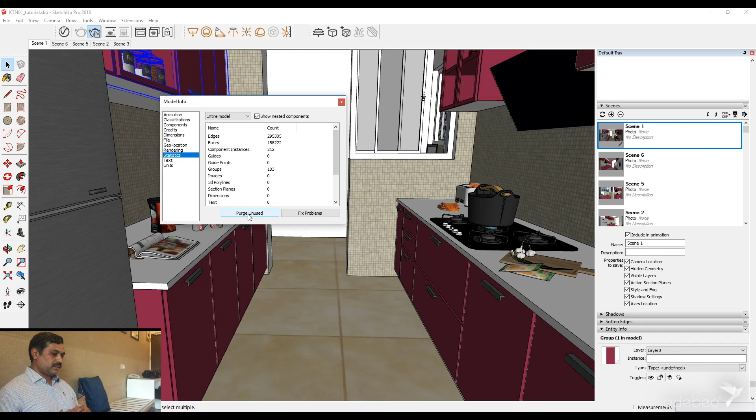Before we start, there are a few things we would like to look at in the model. The important thing is the purge. You can access this purge from the model info and make sure all unwanted elements are removed from the model. The entire model goes into the memory of Vray in the background, so we have to make sure we clean up the model perfectly before we get into the rendering.

The other important thing I would like to check is the orientation of the faces. It's important to know whether, when applying the material, we have used all the front faces. There is a trick in the styles that we can use to check whether all our faces are oriented properly. So if you go to the styles, you can set up the front face and the back face as a different color.

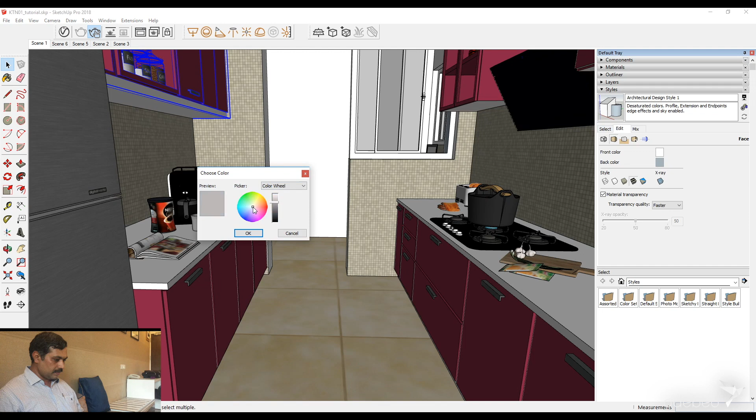I'm changing it to red color at the back so that we can clearly identify any elements in the presentation. Right now we are not able to make out anything here because everything is shown with the shaded texture. The moment I change it to monochrome, we'll be able to identify if there are any surfaces that we need to address.

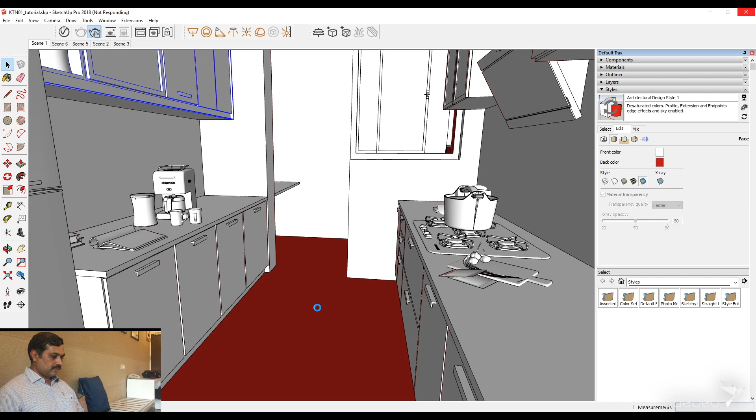So now in our model, you might see that most of the surfaces are looking correctly oriented except the one at the bottom, which is the floor, and that might require some kind of fix. So I will reverse this particular face so that it will orient the white surface on the top and the darker surface on the back.

Once these settings are done, we can move forward with our rendering settings. Before you go further, it's necessary for us to make sure we add all required details in the model, such as the gaps that we want to see in the rendering, because the rendering engine will make sure the light passes through each and every gap.

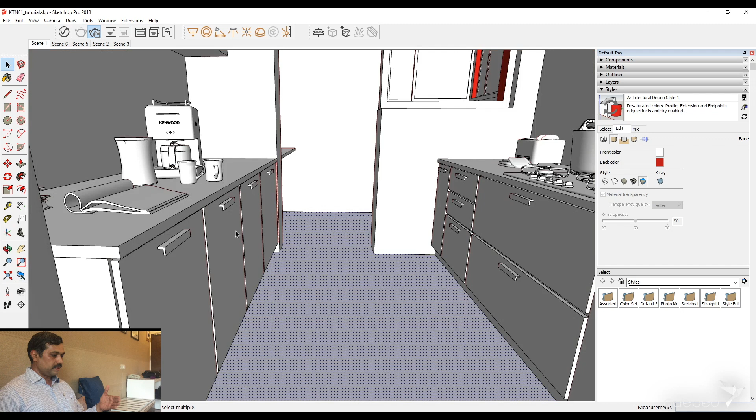Whatever the outcome, it will look nice when we have these details in our model. So don't hesitate to add as much detail as possible in your model, and it will be good in the presentation when you render it.

As you see, there are several scenes created in this particular model. It's very important for us to identify if we have any elements that are not part of the scene but are loaded in the model and will cause delay in our render.

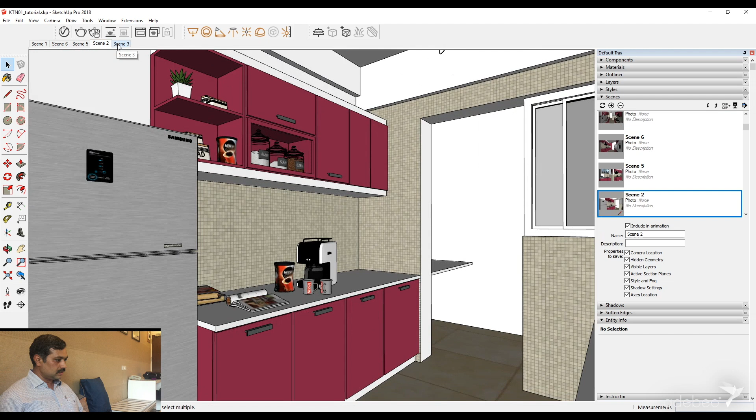Some of these elements could be high poly models, so we need to quickly check if we have any add-on model or component which could affect our rendering. I'm just quickly going through the remaining scenes of the model and checking if we have anything on this particular model. Okay, I'm finding it.

There is a model or component over here which is a high poly model, which could impact our rendering because this is not part of our scene 1 but it is in scene 5, and we need to make sure it is not affecting our rendering.

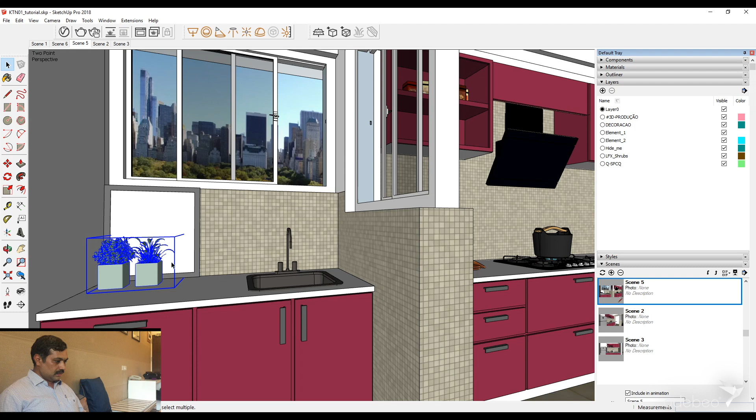The way I manage these things is using the layers. So we go into the layer and create a layer, let's call it 'hide me', so we know we have hidden this particular element. We will assign this layer to this object. There you go, so this object is in the layer now of 'hide me'.

So we will go back to our scene 1, and in scene 1 we will make sure the 'hide me' layer is off. So now we know that particular component is no longer loaded in the memory of our SketchUp model.

So all the elements we see here will get into the memory of Vray once you start hitting the render button. So we are all set to get into the Vray interface now. These are the three things that we need to make sure: we purge the model, we check for the front and back surface, and also make sure unwanted elements are removed from the memory of the tool using the layer mechanism.

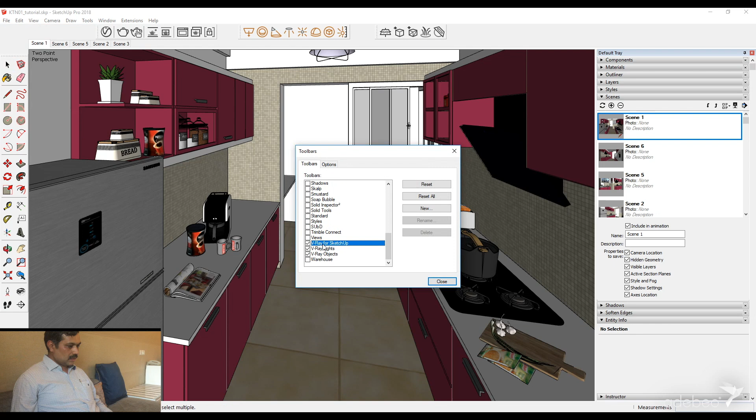When you install Vray, we should be getting three toolbars. If you don't see them, you can access them by going to view toolbars and looking for those specific toolbars that are installed. Please click on the checkbox and the toolbar should appear. The three toolbars are the main toolbar, which is Vray for SketchUp, the light toolbar, and the geometry toolbar. Being the beginner's toolbar, I'm limiting our scope to these two toolbars.

The first one here is the asset editor, which controls most of the functions of Vray. After that, you see these two kettles - they are the render buttons. If you hit any one of them, the system will go into the render mode. So right now I'm not hitting them. After that, you have something called the viewport render. The viewport render is the current viewport, whatever we are seeing, that goes into the render mode.

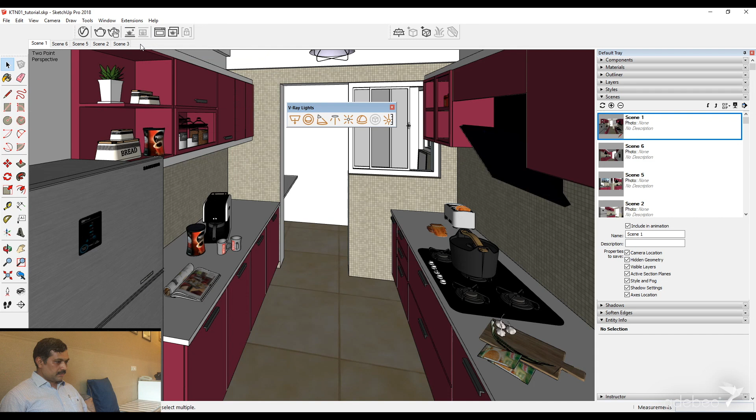This is something new appearing in Vray 3.6. Along with that, we have Vray viewport render region. Region and viewport render work together, so once we switch on viewport render, we can use region render. Now let's click on each one of them and see how they behave. Let me place them on top of it and start using them.

This is the master tool which connects us to material, lights, geometry and settings. In this panel we can expand either on the left or on the right. If I expand on the left, I'll get the material library that Vray has provided - a vast library which we can use in our presentation. You can even change the way they are being presented. This is the list view, and we can change it to a grid view to see how the material looks.

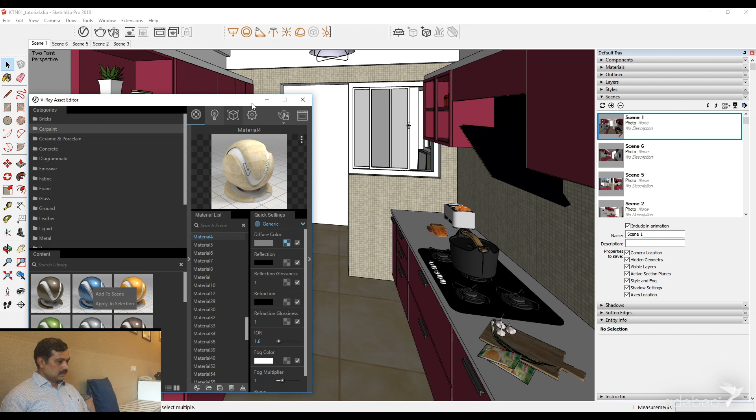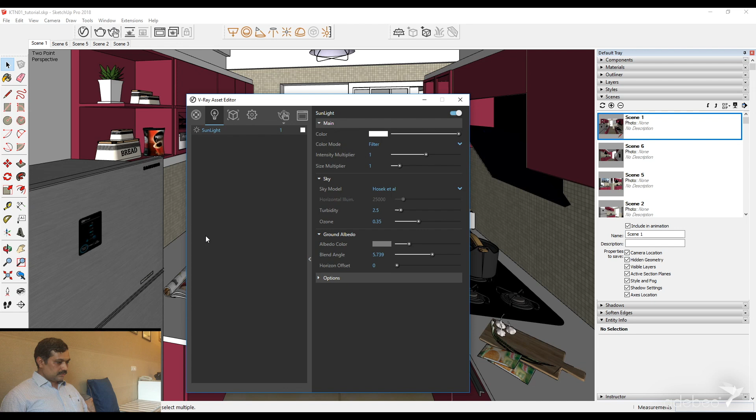Whatever material we want to bring in, we can directly right click on them and bring it onto the scene. The other settings I want you to take a look at this point are on the right side of the panel. You get more options controlling the material parameters. Because we are in materials, we get material related parameters, but as we move on to other subjects like lights, the right side panel changes and relates to the lighting parameters. So with the 3.6 version, the left and right panels appear according to the choice we make at the top.

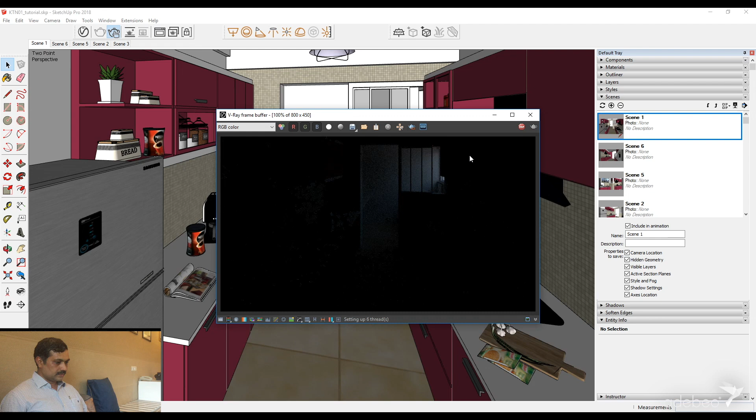The next tool is the render. There are two render tools available: one for production and one for test purposes. We can use test renders here, and remember, the moment we hit it, the system goes into render mode and it will take a couple of minutes to regenerate and show us how the render looks. For the test render, I will hit the test render now and we can take a look at how the render will come out.

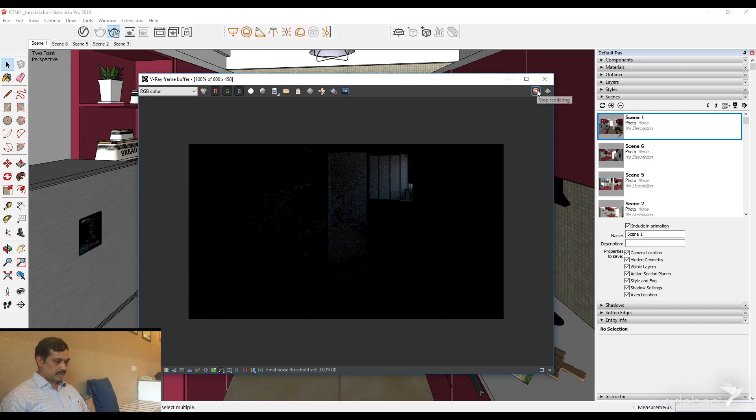This is quite dark right now because we haven't set up anything in terms of the lighting, and now we are seeing the interactive render mode. This is an infinite rendering loop wherein the system will continue to refine the noise appearing in the model during the render, and we need to stop it so that once we are happy with the render, we can stop it so the render is discontinued and we can continue to improve the rendering properties. This is the Vray frame buffer window which shows us the rendered image.

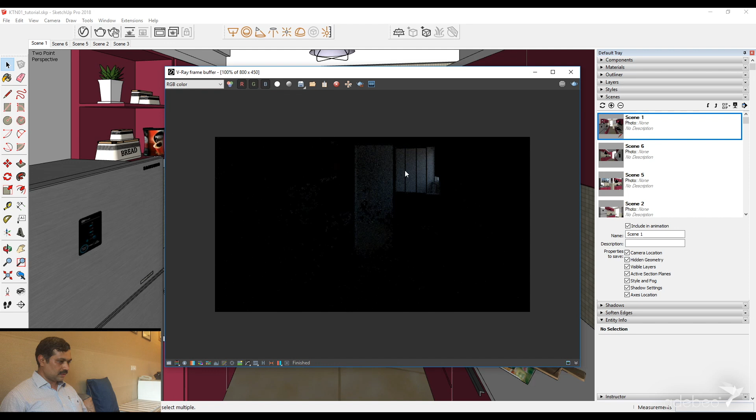We have several channels here that are part of the render. You will be able to see or switch on or switch off these specific channels. It's advised at the beginning you can keep them and take a look at all three channels we are getting. This window you can terminate and then recall from the frame buffer menu on the menu bar. So if I launch it again, we know the last rendered image is available here and we can take a look at how it was.

Also we have something like a region render which we can use here, so we can select a specific region to render, and when we say re-render, this is the re-render button on the top right which will help us re-render the specific region while doing the renders.

As you notice now, the rendering is only calculated for the small area that I had selected. This will be helpful for us to do test renders with several changes in the material. We can locally select a specific region and render it very quickly to see the result.

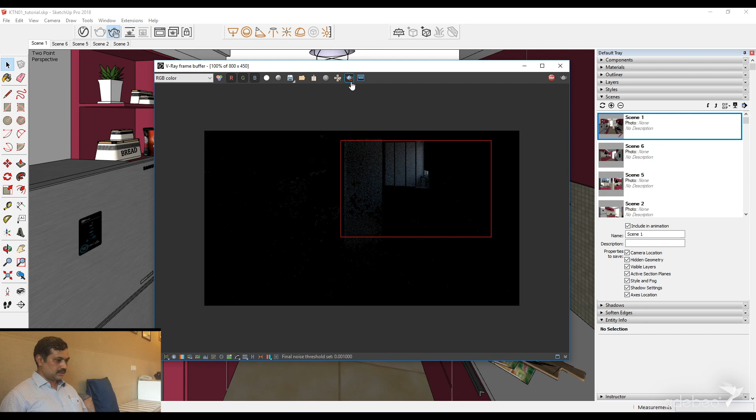We would like to now see how the render engine is configurable. If you click on the main button, which is Asset Editor, we can see the settings button on this, and we can start making the changes. As I initially did, we did the interactive render, and the second option we see here is the progressive. As you know, with interactive we can very quickly see how the render is getting set up, and progressive render we will use for the production mode.

Also, you see there is something called quality which controls the output of the render, and we can expand the right panel and control a lot of other stuff here. Since this is for beginners, I am not getting into a more detailed explanation about these things. We can right now set the quality to maybe draft or low, and then we can fine tune it for the final render.

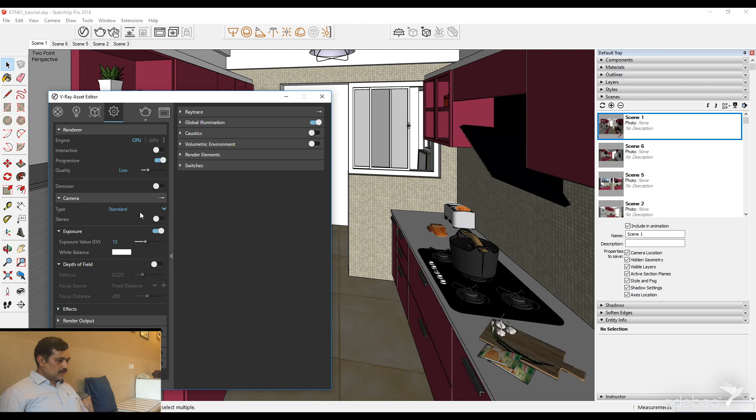There's also camera at the bottom here which controls the exposure value, which we can start changing to a different value. The lower value will give you more brightness and the higher value will give you more darkness. So depending on the requirement, we may have to configure this value. And now we have all set our render engine and camera.

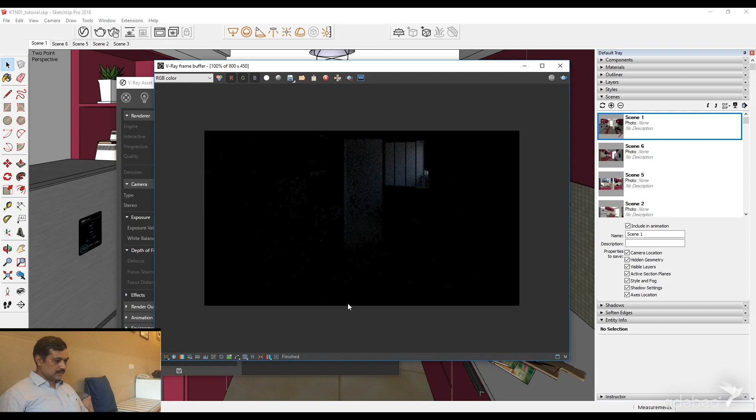To be on the safer side, I'll turn off both interactive and progressive mode. This is bucket rendering now, which is a little faster and the traditional way the render engine used to work. So if we hit render, we will get the newer version of the render quality that we can achieve. So let's wait.

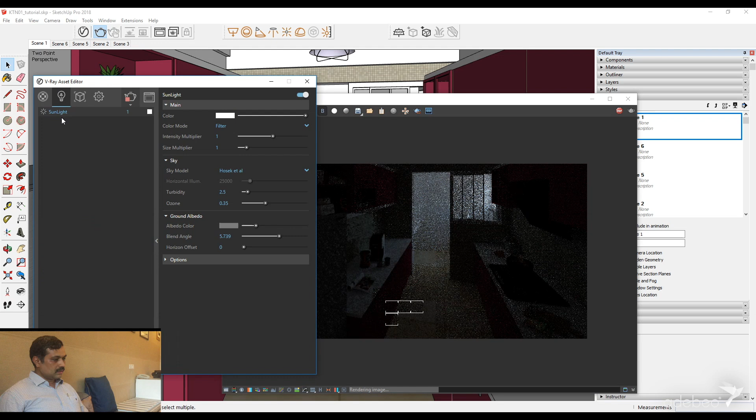Right now you see there is a light appearing, and this is appearing because there is a sunlight that's enabled. As and when we start the rendering in SketchUp, normally the sunlight is on and this sun is coming from SketchUp, and V-Ray treats that as a source of light, and it gives us the render. So we will wait for our first render, and there we go, we have the first render appearing.

We have already applied several materials in SketchUp, and when we start setting up the rendering, it is important to get the lighting proper. I was going through the materials here, and I realized we have a lot of materials that will affect our render.

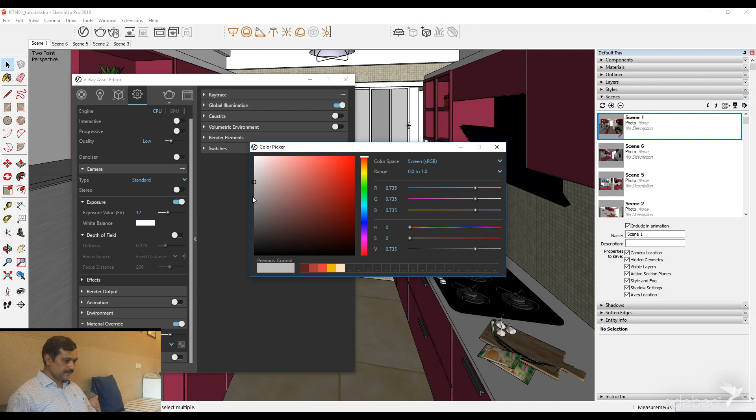So we will start by going to the material override and taking out all the materials, so it will replace the multi-colors and textures that we have applied with an override color. The override color can be set to any color that we wish, but the best way is to use the already preset color, which is gray, and start setting the light after this.

Lighting is the hardest part of rendering. It's a really critical area where we need to know that we have an equal or proper ratio of light coming from the external source and the light that we are adding internally. It's really important for us to spend more time getting the lights right in the right location.

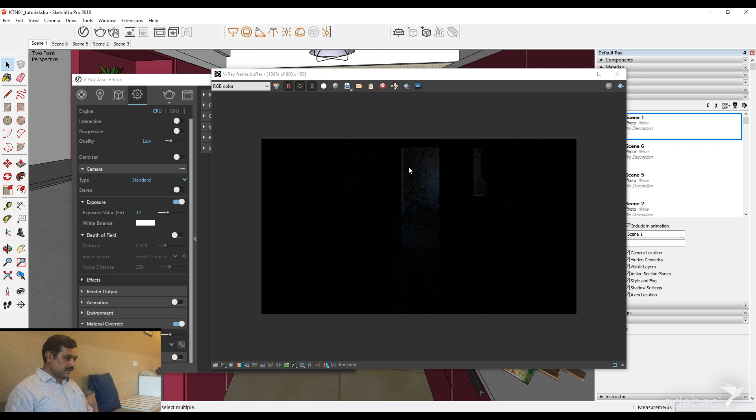As you see from the earlier renders, the room is quite dark, and we need to improve the lighting inside the room. The light toolbar from V-Ray gives us options to add rectangle light, sphere light, and spotlight. These are the different varieties of lights provided, along with the IES light and Omni light. We will be using a few of these lights in our tutorial and see how we can build them in our presentation.

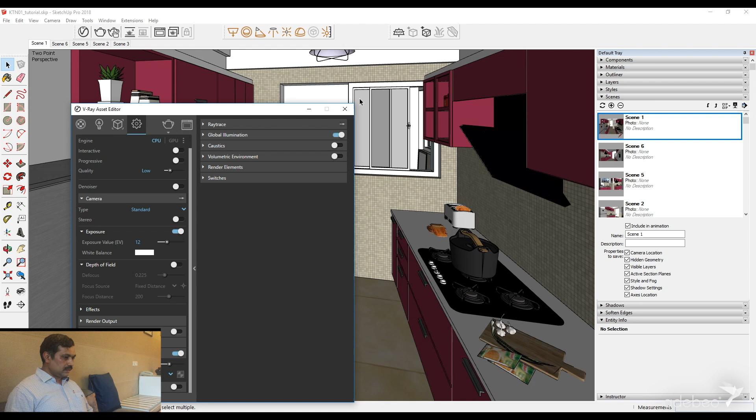I was reading in one document that photography is the art of putting the photons and writing your own image. So you are really creating a nice presentation of your 3D model. We will have to make sure you get the lights right, and the more light you add, the better the image will look, because the light can reach each and every corner of the room and you can see things more clearly.

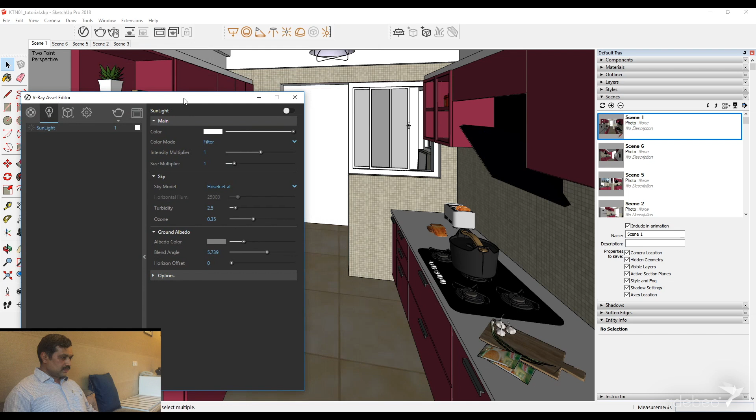Asset Editor will provide us access to the lights here, and we see right now we have sunlight. We can use the button over here to turn the sunlight on or off. Also, we can increase the intensity of the sunlight if we are using it in our workflow. Interior renderings require a kind of scene light rather than sunlight alone, so we will be using a dome light technique here, which will bring additional light into the scene. So I have turned off the sunlight and I will use a dome light.

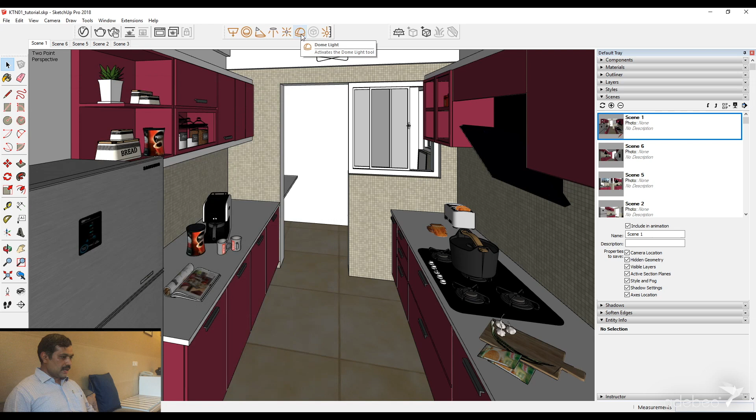With the dome light we can add an additional source, which is called HDRI, high dynamic range image. To place the dome light, you can click on the dome and then place it anywhere in the model. The light will be available inside the scene. Now if I click on the dome light and go back to my asset editor, you will see a dome light has appeared, and we can add properties to the dome light.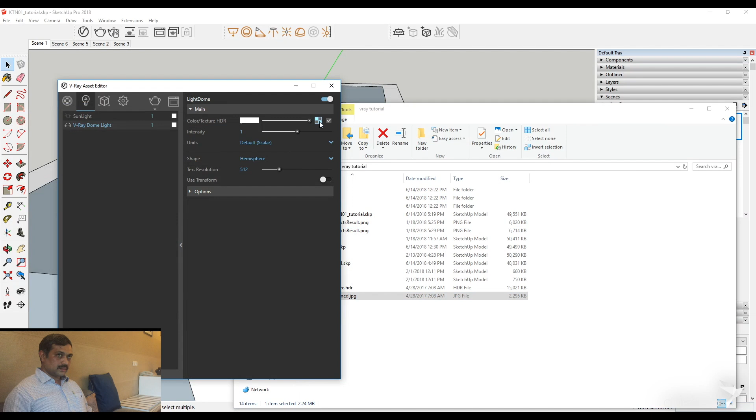We will add the dome light. We will be adding the HDRI into the dome light so that we can get the quality of light that we have seen in the HDR image. Click on the mapping, it will take us to the next screen, and here we can browse to the file. The file which I downloaded is called Sky Cloudy Free HDR.

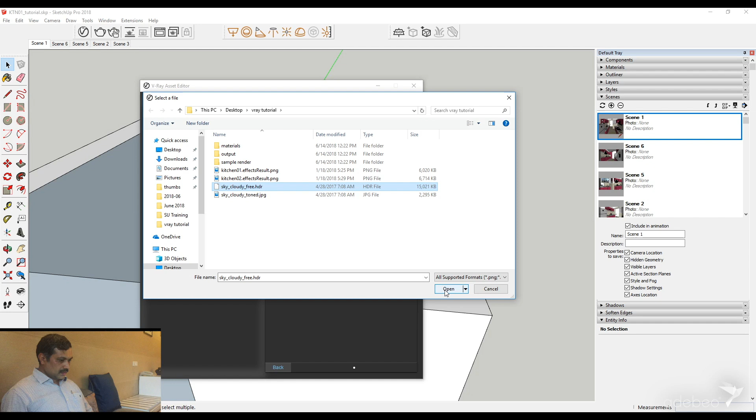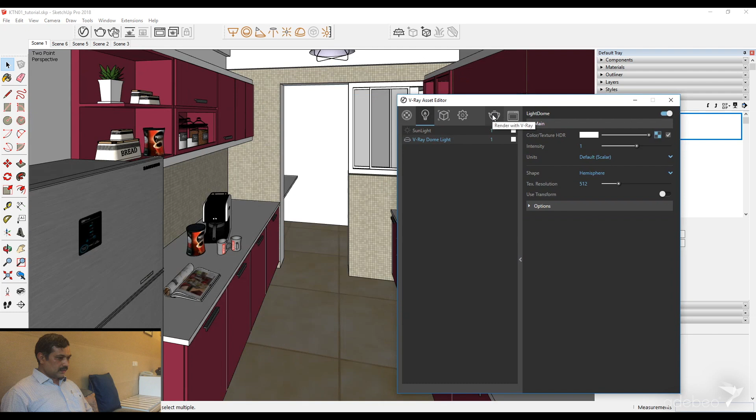You can find some of these on free internet websites, and you can download them according to your requirement. I am taking one of these files, and now we have that file in our dome light. Let's go back to the scene and see if we have got the light properly. As you see, I have switched off the sunlight and we have the dome light on. So let's click on render, and see how the quality of light changes with the dome light.

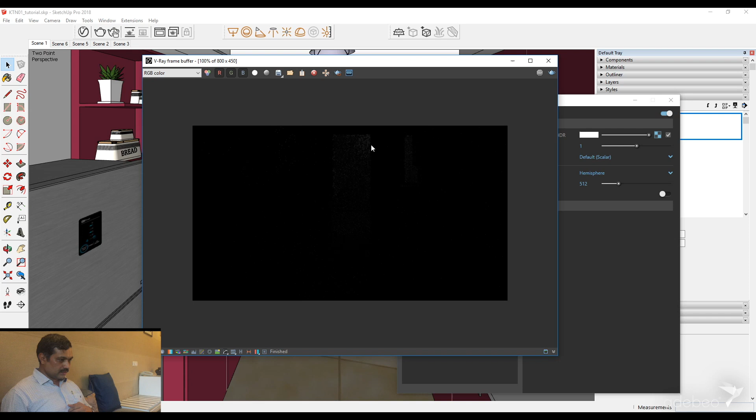It's important to have a combination of lights running. The best way to have a combination is to have a dome light with the HDR, which can give you good quality light. It's very dark right now, but still I can see illumination of light coming from the window. Let's increase it to maybe 25 and then we can continue with adding additional lights in our workflow.

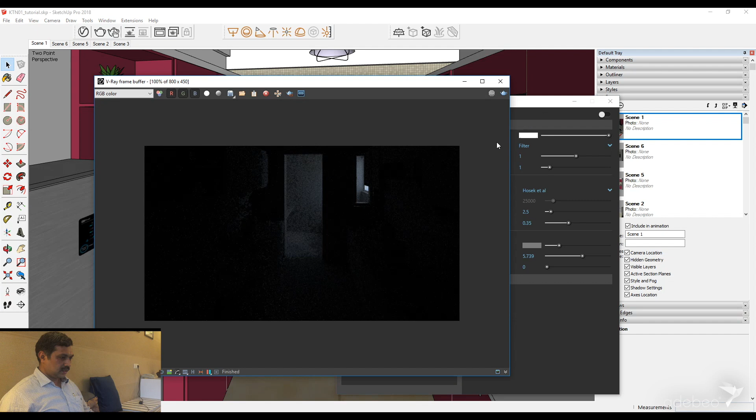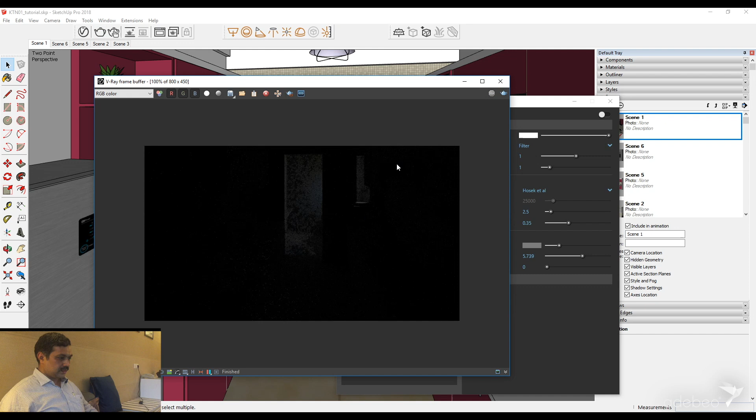Let's render it with the dome light with the value of 25 and see how the output looks. The room is still dark and we need to add more lights. So now we will add additional lights in our presentation so that it looks brighter, and we can use the existing dome light and continue to add more light. The next light that we will add will be a rectangle light. Right now, the light which is entering from the window is very dull.

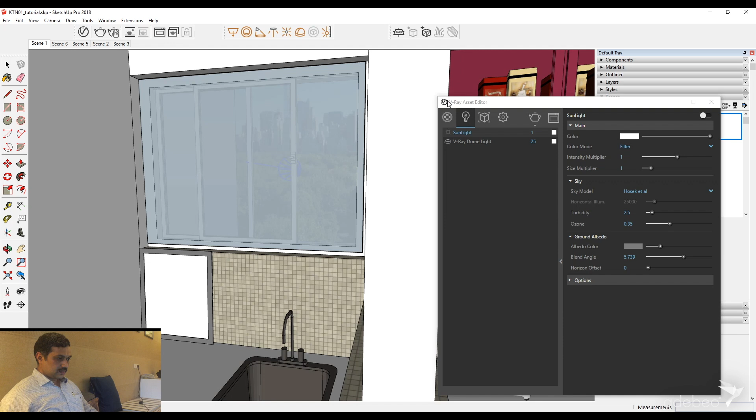So let's go and add a light. I'm browsing to the location and let's add a rectangle light on the window here. This light will act as a portal light, and we need to change it in the settings over here. So this is the rectangle light we have, and now let's see where we can set the control as a portal light. This light will be increased with the intensity we type here and the light that is available.

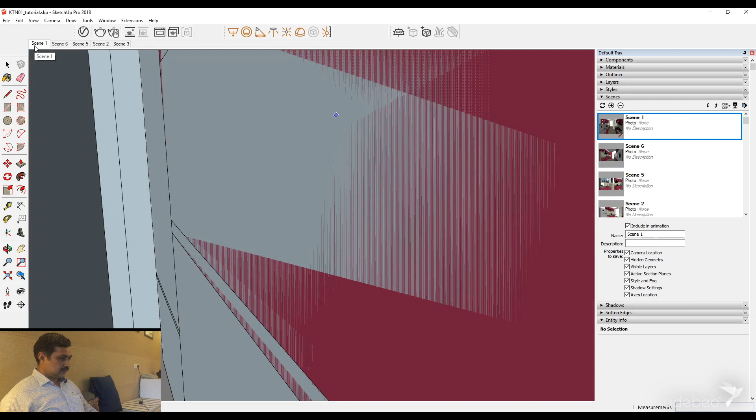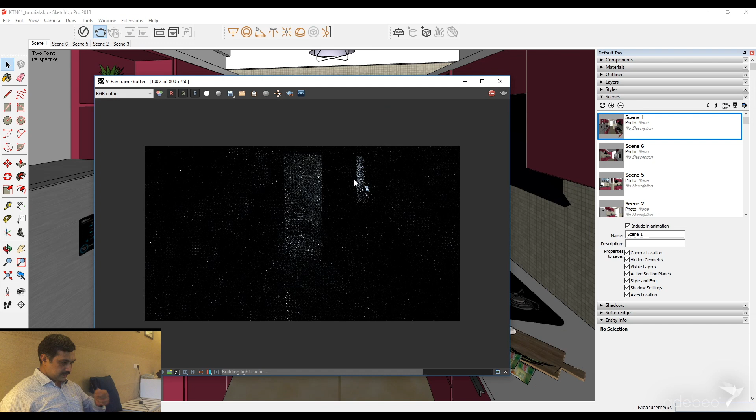Let's go back to the scene and render it again. Now we will be able to see brighter light coming from the window, and this will be better for our presentation. Along with that, we will add more light. I will stop the render and we will add one more light, maybe at the ceiling here, and it will look much better. Let's take the rectangle light again and place it on the ceiling.

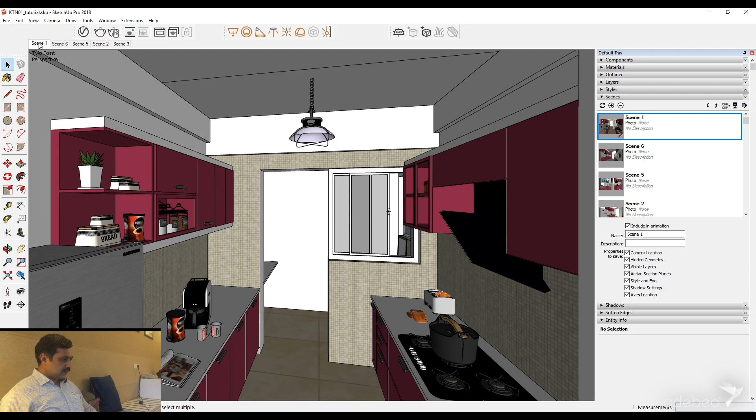Make sure when we create the rectangle light, the white surface is illuminating and it is facing our materials where it has to fall. Let's get back now and render it again. Wow, now it looks far better, and we have a light source also appearing at the back where the light is entering from the window. It's not very powerful, but it looks much better. Now it is time for us to set up different lights and also more materials. If we look at our frame buffer, the output is better than it was earlier.

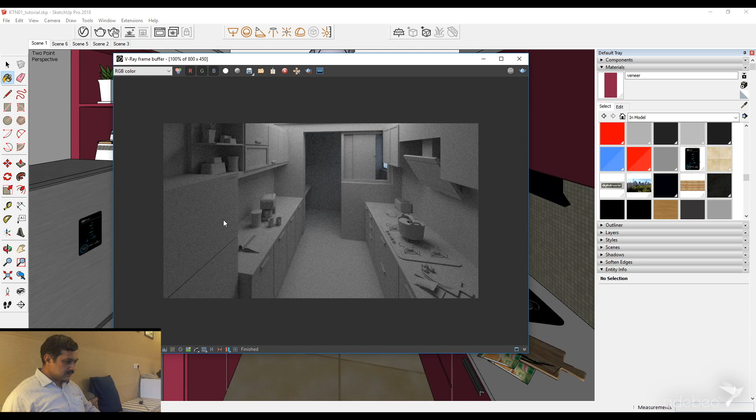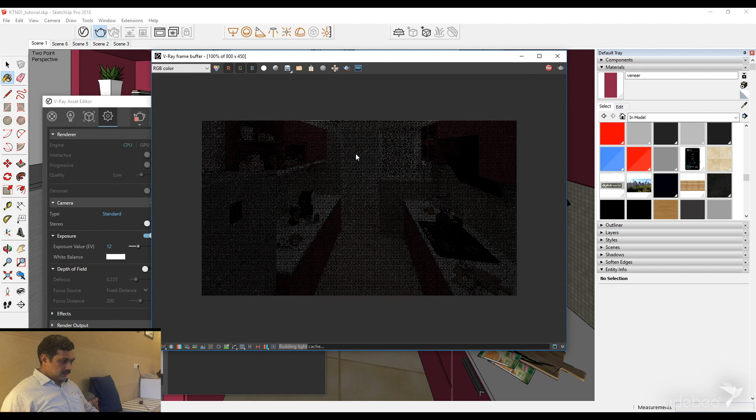Now it is time to switch on the materials that we have already captured in SketchUp. All we have to do is go back to our settings, remove the material override, and take a look at how the render is looking. The materials we are seeing right now are coming directly from SketchUp, and you might see they are all diffuse materials; they don't reflect. So we need to add more properties to these materials. Let's look at each one of them in detail once the render completes.

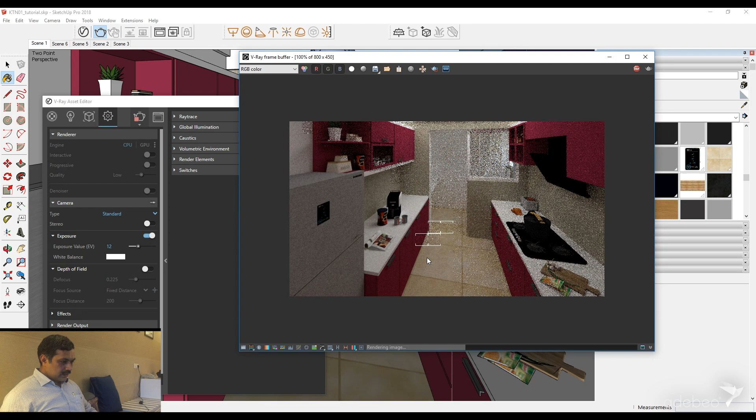The more lights and materials, the longer the calculation takes, and the output will be finer and finer. Looking at our frame buffer output, we know that we need to add more quality to the materials we have. So let's start using the asset editor again and improve the material quality.

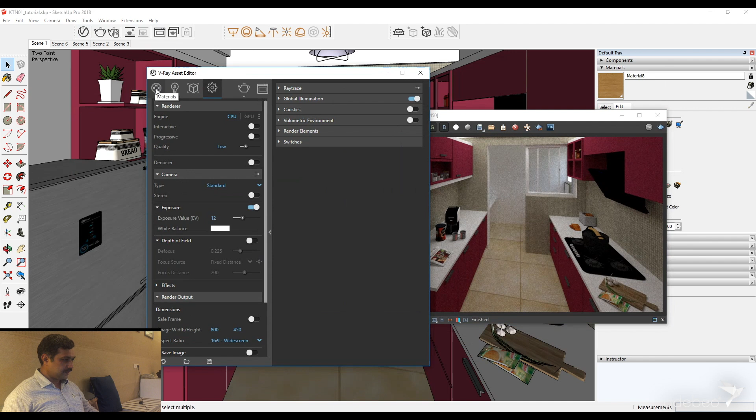If we go into the first icon, which is materials, we can see all the materials that are applied in this particular model. To access the material, I will be using the paint bucket as well as the material editor from V-Ray. I'll be using the paint bucket. Select window, and we will use the copier tool to get the material.

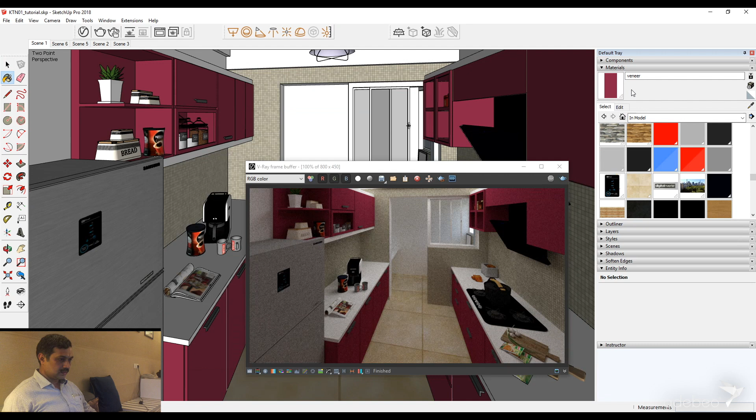Let me take the first one, the veneer material, and now if you go to the asset editor, that particular material is highlighted. The material that we highlight in SketchUp gets highlighted in V-Ray, and the same way the material that we select in V-Ray gets highlighted in SketchUp. So right now, as you see, the veneer is available in both locations, and now let's try to improve it.

The major properties you see here are the diffuse color, the reflection color, and the refraction color. As you know, the diffuse color is appearing because of the map that's been applied. So we will try to add reflection quality onto this map by going to the color picker, and we need a reflection of high quality or mid-range quality. The more we go into the white, the more the reflection increases. So I'm keeping it to a mid-range.

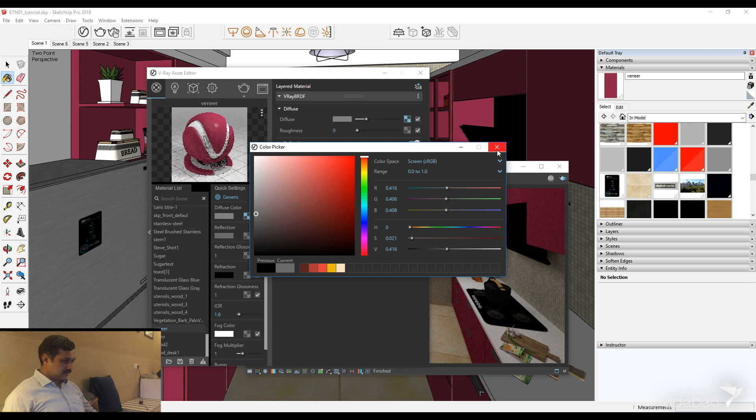This looks fine. We will terminate that, and we can change the reflection glossiness value. If it is 1, it is highly reflective. We can make it a slightly lower value, so we have a reflection spread rather than a very highly reflective material.

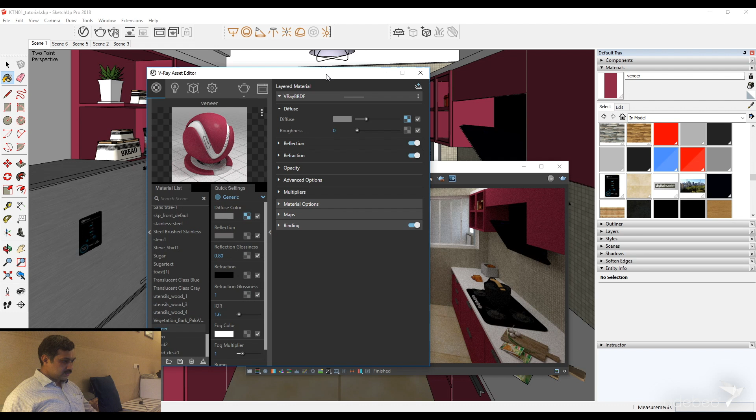Now to check that on our model, we will use the region render, which we can use here, and maybe we will test the region from the top to the bottom and see how the quality of the material is changing. Once we select the region, we will have to re-render it. So let's wait till the calculation happens again for the rendering.

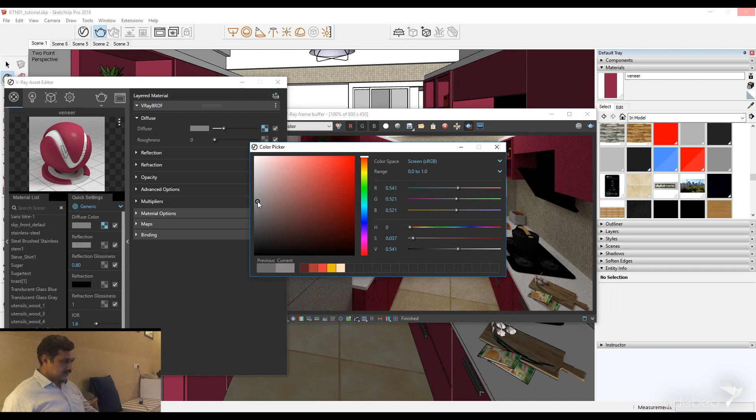Every time we hit render, all the memory of the tool goes back, and it will only calculate the rendering for the region we have selected. So region render will help us fine tune the quality of the material faster. I want to increase the quality of reflection further, so let's go back to the reflection and increase it substantially on the material. In this way we can make changes on the V-Ray material that we already have from SketchUp and add the required properties.

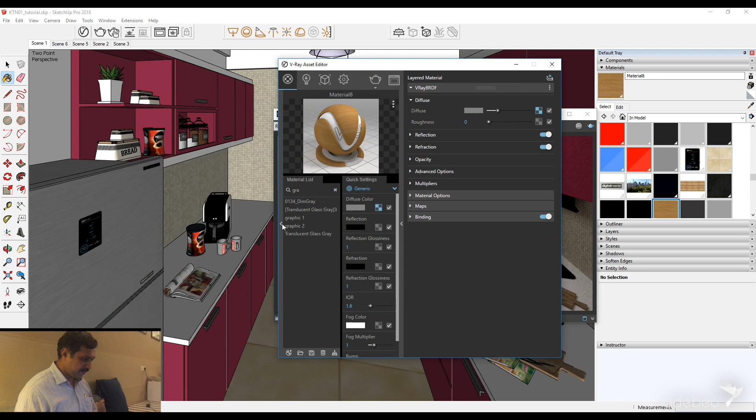We have a huge library of V-Ray materials available. If you expand the left panel, we can see there is a huge material library available. For the countertop, we can use some granite material here. So I'll go to the stones, and we can pick and choose any of the materials here. Let's bring the material into the scene first. So I'll take this material and add it to the scene.

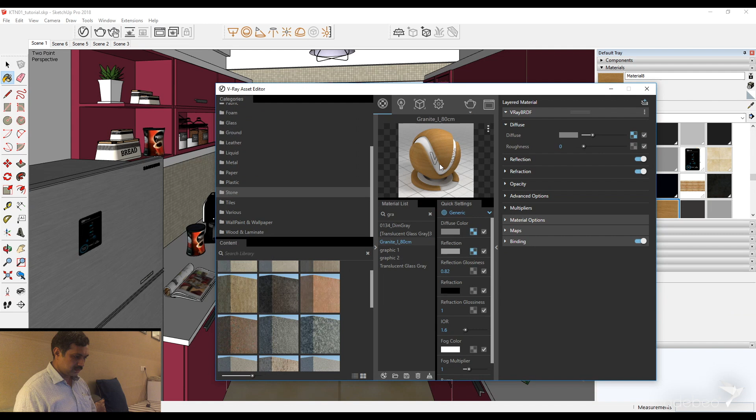The moment we do that, that material will be available in V-Ray, and we can apply it. As you see, this particular material is added in V-Ray now, and we can apply it to our model. Let's use the color copier tool again. We will take the material. This material needs to be replaced with the granite material which we have added right now.

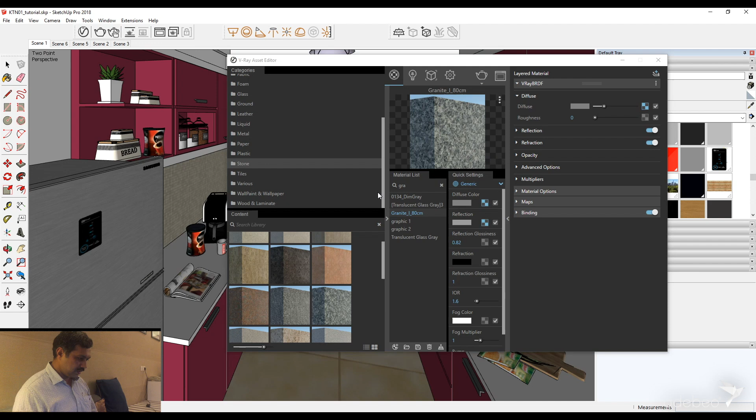As you see, when we add the granite material, there is an indication of size. So we need to correct the size once we apply the material. So let's take this material and say use as replacement. We copy this material, and now we pick the countertop material, which is this one, right click and say use this to replace the existing material with the new one. The moment we do that, you will see that on the model it's already replaced.

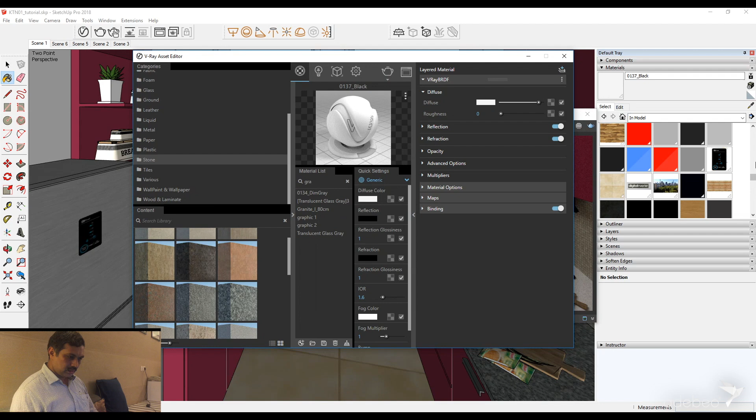Let's fix the size by going to edit material. Let's take the material, edit, and set the size as 80 centimeters. That looks good now, and we can reload our frame buffer. The frame buffer is in the same state as when we created a region render, so we can use the same to test our render again. It will take a minute to reload all the new materials we have added in the recent change.

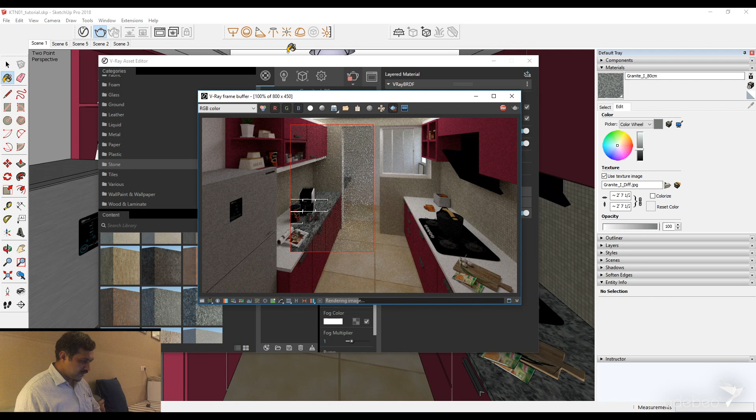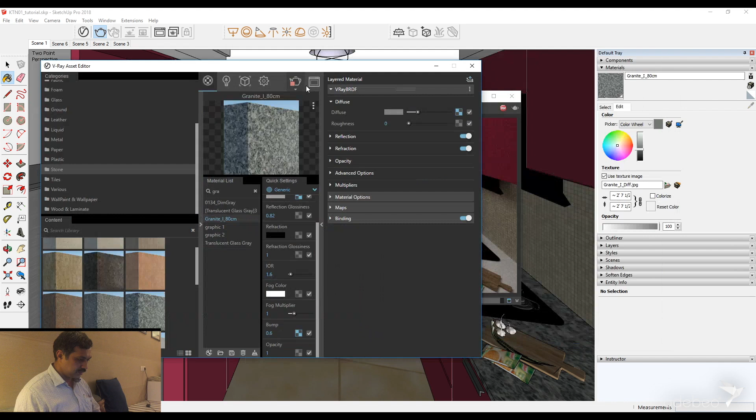There, it looks really nice now, with more materials of good quality. The advantage of using V-Ray materials is that you have the setup already created with reflection glossiness, and many times you will see a bump getting added. This is the way you can add more realistic things to your presentation. Don't hesitate to look for materials which have a bump, and the output looks far better than it was earlier.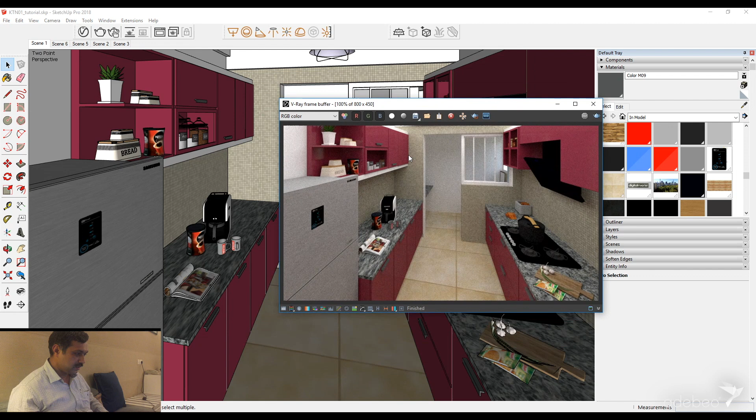This is the render image we are able to get by adding additional material, but we can continue to add more lighting here under the wall panel. So let's go and try to add a spotlight. I'll be going very close to the object where we need to place the spotlight. This is the spotlight which we can use directly. Once you click it, it is looking for a location.

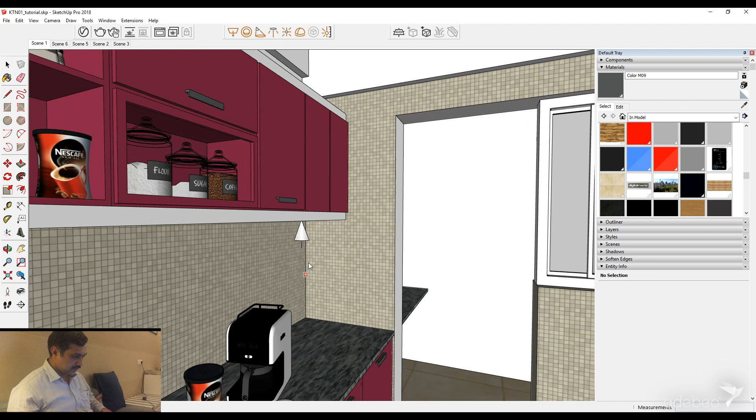This is the newer spotlight available from the V-Ray team, and if you look at it, once I place it, it will allow us to size it. So we can use the scaling tool to size it as much as we want. And then if I go back to V-Ray now, we have a new element, which is the V-Ray spotlight. We have two parameters which control the spotlight behavior. One is the cone angle and the other one is the penumbra angle.

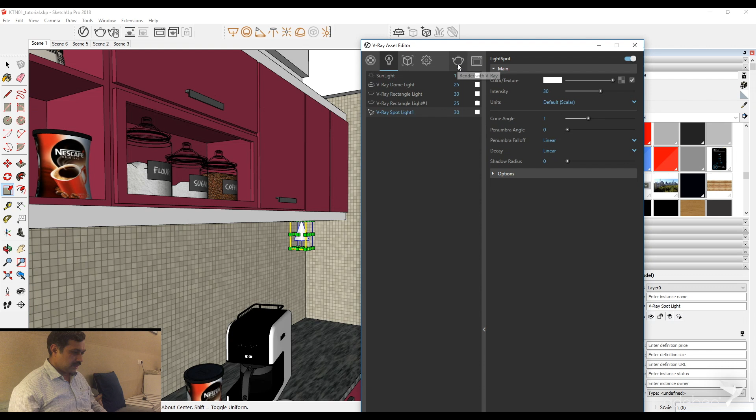So let's switch it on and render it and see how the light looks. I'll go back to the frame buffer and we will render it, but with a region render, so that we only render a specific region. After the render, we see that the spotlight is appearing nicely with sharp edges. So let's go and edit the parameters. The parameters we have to change are the penumbra angle and the cone angle, so we can improve the appearance of the cone and the circular portion here.

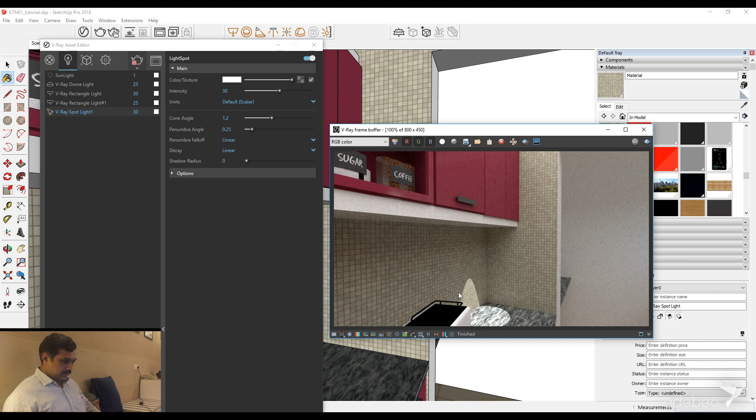So I'll change the cone angle to 1.2 maybe, and then we will change the penumbra angle to 0.25 so that we can have a nice spread instead of having a sharp line over here. And let's re-render so that we can see what changes are happening on the cone angle. Also we can click on the color here or here, and we can add a different tone or color. Right now, as you see, it is white. We are pointed to the white color.

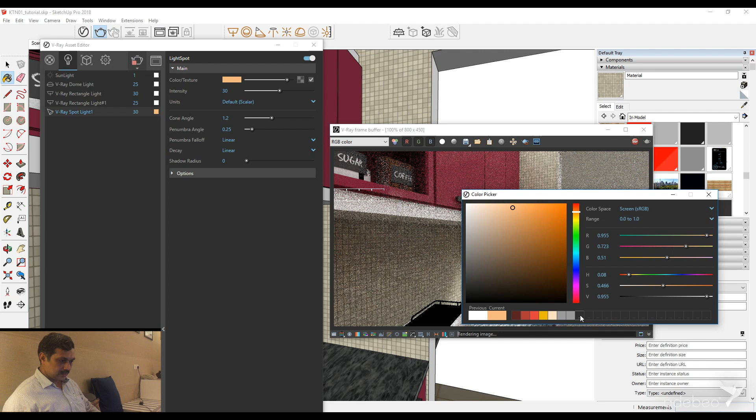We can maybe take a warmer color, something like that. Maybe lighter will be better. The moment I am selecting it, it's automatically taking that particular color. You can also store this color in the swatch by just right clicking on the swatch anywhere. Since the render started earlier, this color is not appearing in the render right now, so let me stop it, and we will do one more region render and see how the output is appearing.

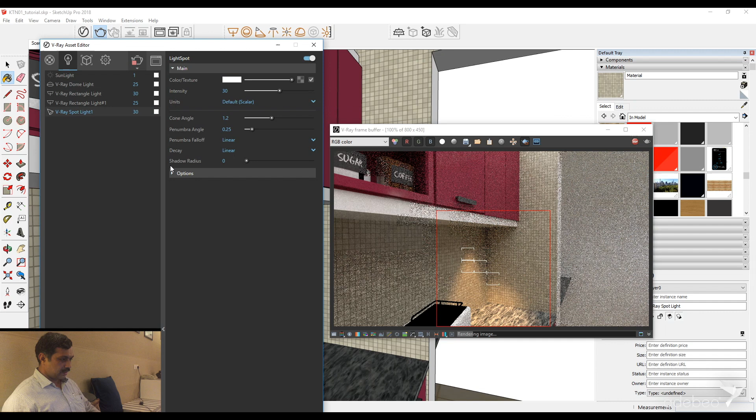Now this is with the color that I have applied specifically on the light. And if you want to swap the color, we can always drag it and drop it so that it's back to the white color. So we have a lot of flexibility while preparing the presentation rendering using version 3.6. After adding all the materials and lights, the visualization will be improved extensively. So now it is time for us to set up for the final render.

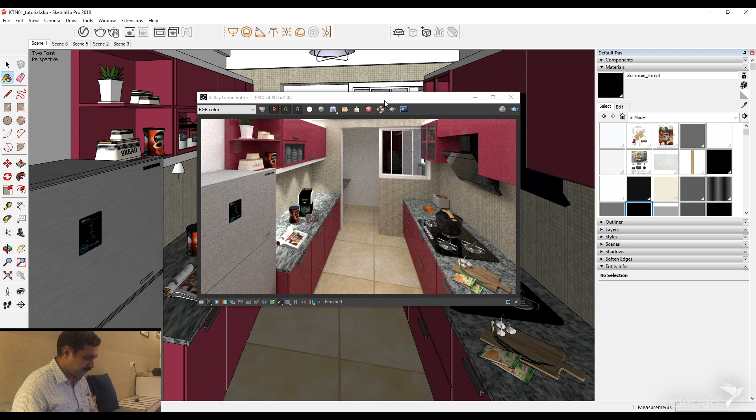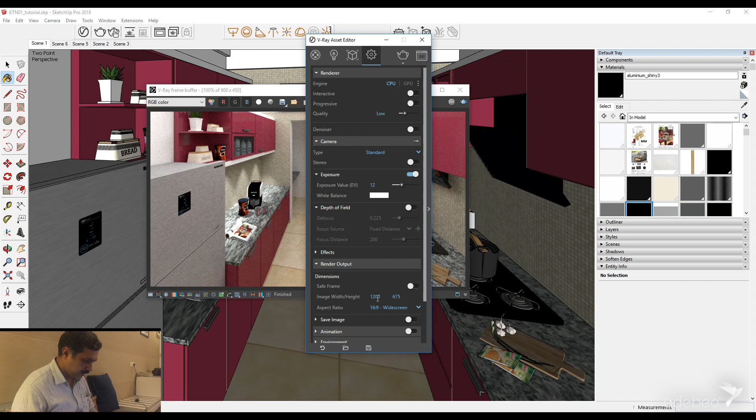I'm going back to the asset editor, onto the settings, and here we can change the render output. Let's take that to maybe 1200. The higher the image width and height, the longer the render time, but at the same time the quality when you zoom in will be much better. So if you want better quality, you have to change the size here. Finally, we have to set up some more properties so that we get a much better output.

We have something called render elements. We will switch on the denoiser. The denoiser will help us clean up the noise that we are seeing on the rendered image right now. There is a certain amount of noise that the software is calculating, which will be cleaned by the denoiser tool. With this, we should be able to get the final render that we are planning to achieve.

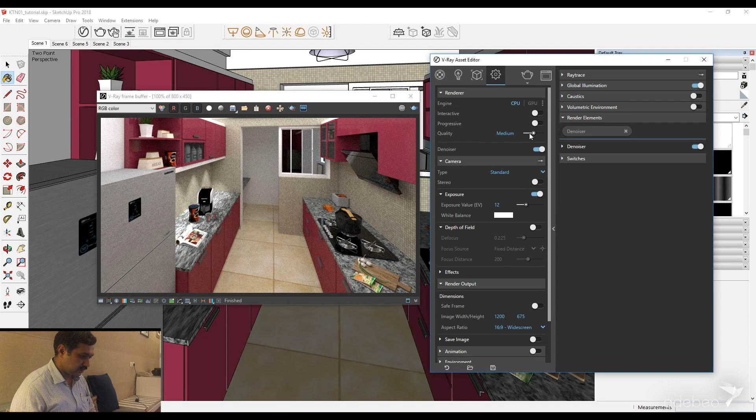Make sure you have applied the material and reflection properties wherever required, and you can use the standard material from the material library to add additional material that you want to have in your presentation. With that, we will launch the final render. Finally, you can change the quality here from low to medium. Make sure the hardware is sufficiently robust so that you can get the outputs quickly. Now it's time for us to do the final render. There we have the final image.

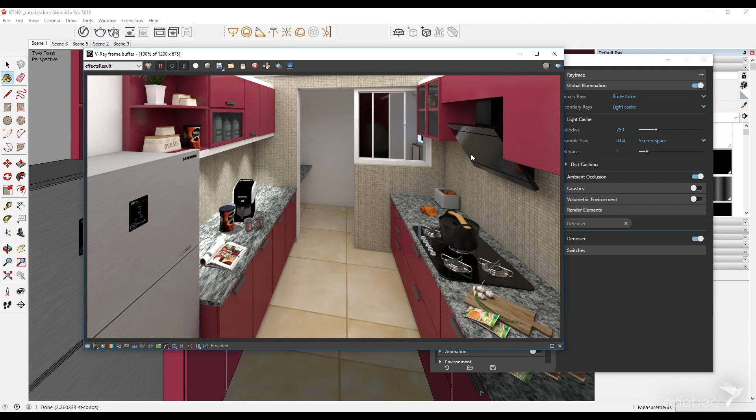I hope the workflow from SketchUp to V-Ray, with the material, with the lighting, and how to achieve better quality as we progress on improving the content,